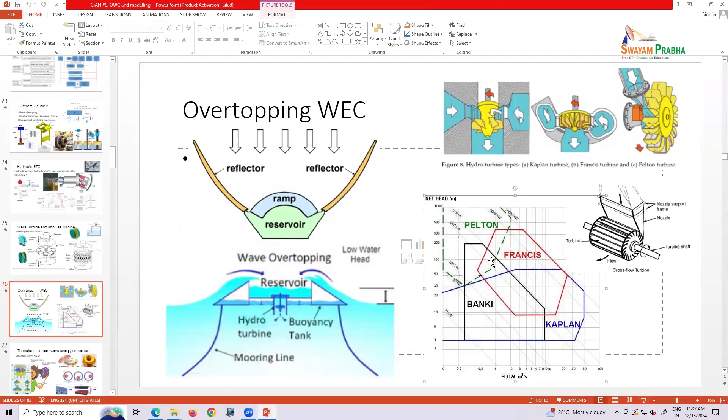And let's take a look again. Before that, I didn't put the figure of the Banki turbine. Okay, this is the Banki turbine, to give you a sense of what it looks like. Actually, it's just a cross flow turbine. So look at this figure again. I make it slightly larger. Okay, this direction is flow. This direction is head, right? How high the water drops.

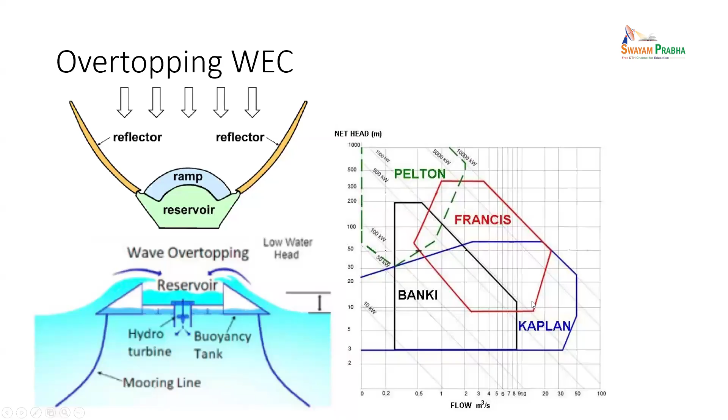Okay, and water head times flow is power. So this is why there's this line, 10 megawatts, right? This is 1 kilowatt, and that is 10 kilowatts, and this is the 1 megawatt line. Basically, the cross flow turbine and Banki turbine work for low head, 3 meters to 200 meters, at a flow rate of 0.2 cubic meters per second to about 8, right? So at a power rating less than 1 megawatt, it can be 100 kilowatts.

So for this suggested range, the energy and head relationship, in between there's a flow rate. Head times flow rate will be energy. This is why in this figure there's also energy here. Is this clear? So head times flow rate will be energy. Head and flow rate are the guide to help select the turbine. Water head is just potential energy.

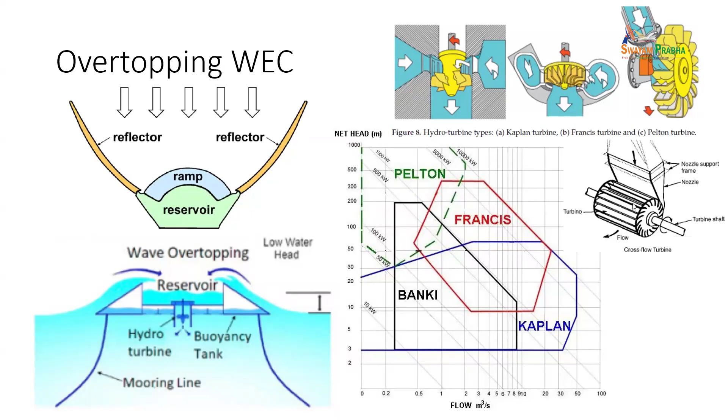This is overtopping. In overtopping, you accumulate water there, and the energy is just delta H times how much mass goes down at what kind of rate. Is this clear? Right. So anyway, this figure shows how to choose a turbine. And basically, this is very popular for traditional hydropower, for the very high mountain area where you go down, right? And this is mostly for overtopping. The head wouldn't be that high, right? Okay, so just cross flow and that type of turbine.

Okay, and self-rectifying turbine, self-rectifying generator, I think is very interesting, right? As you say, in your system you don't want the generator to change direction. There are many ways to achieve that. With a check valve, they use a piston with bidirectional motion and a check valve to convert bidirectional fluid motion into unidirectional, right? And the Wells turbine is self-rectifying. It's nice: air in and air out, the generator always rotates one direction. But there's still an intermediate medium; you use water to drive the air, then air drives this self-rectifying Wells turbine or impulse turbine.

Here, this fluid direct drive is more direct. You can do it at different stages, right? The best is the fluid side directly converting bidirectional motion into unidirectional. Another is the mechanical side, including check valve, one-way clutch, right? All this will be on the mechanical motion side. And sure, you can achieve something in the electric domain, right? The generator, if you go that way and you have voltage like this one, you convert AC to DC.

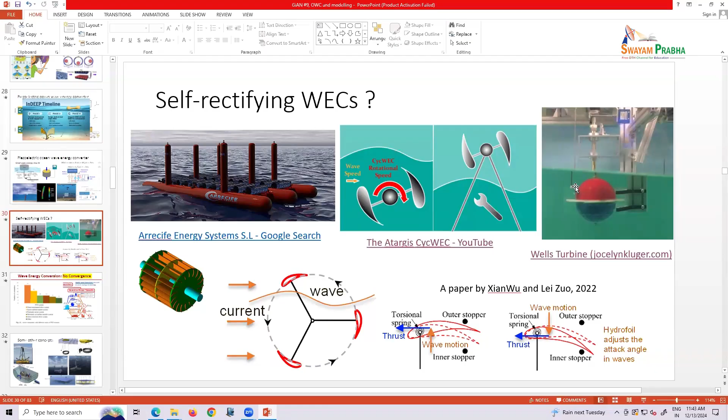So I have to say, a lot of figures I put here, I didn't get a chance to look into for education purpose. Previous 3 years when I taught that, I told students don't put it in public domain, this is for education purpose. But I didn't get a chance to put the reference and where I learned that, since this might be in public domain.

Okay, anyway, so there are many different types of design of PTO, and we talk about the mechanical system, electromagnetic system that can be scaled up, scaled down in a large range. In my view, such kind of system can work from 10 watts to 100, 500 kilowatts level. If you want to build a system like 1 watt or 0.1 watt, definitely the system wouldn't work that way because of the friction, right? That gives you some sense.

And such kind of system design is very tricky, and you need a lot of know-how. I give you one example. The ball screw has a lead angle, right? If the lead angle is large, the motion transmission would be small. Basically, you move up and down, the generator rotates at lower speed. However, if your lead is too small, the generator speed is high, but the ball screw's transmission efficiency is not good. Sometimes you may find out, wow, I need to use a larger lead ball screw, and put another gearbox, 1, 2, 3, whatever like that. Then efficiency will be better.

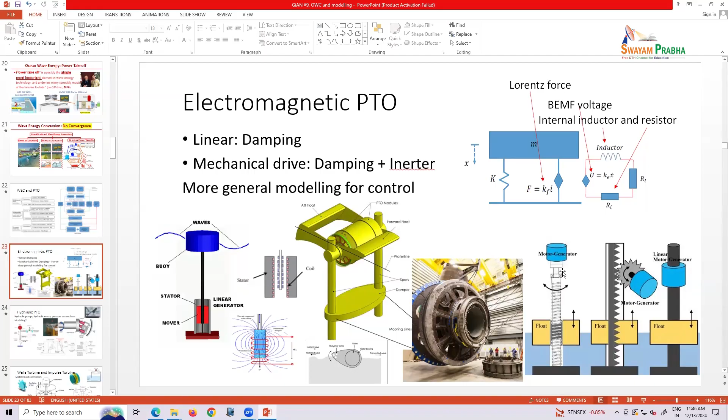When you design that, for example, the bearing looks like here, how to compensate the thermal expansion? For the support, you usually have bearings at two ends, right? If this shaft has thermal expansion and becomes longer, how to allow this bearing to move? Therefore, such kind of bearing usually has a fixed constraint here, and the other end is a slide, right?

For such kind of design idea, you can look into Professor Alex Slocum's open courseware at MIT, fundamental design. They teach you a lot of such kind of know-how. When I was a student, my advisor, a Slocum student, Samir Nayfeh, gave me Professor Alex Slocum's book to read. At that time, I didn't have experience in design. I read the book, wow, I fell asleep.

Okay, and after working years in a company, I looked into the book again. I feel, wow, Slocum really has a lot of good experience in design, right? It's different. So I always tell students design is not so easy. It's not like, okay, I get a technician and I can get the work done. No, it's not like that. It's a lot of know-how, a lot of knowledge.

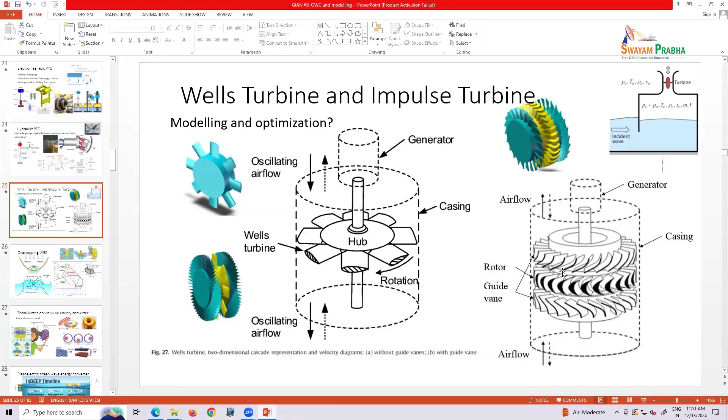There's some problem here you can imagine. The air is very dirty. When I visited a company in Spain, they built this turbine, and they had some sort of water spray on the turbine to clean the salt. In the ocean there's moisture carrying salt, and it accumulates, so they have to spray water to clean that.

So the overall wave-to-wire efficiency, considering the energy. Let me take you back to this figure, I'll give you some comments. So you go here, right? Some energy gets reflected back, and some energy goes to the air chamber. In the air chamber, the energy drives the turbine. I say the turbine efficiency can be 50, 40, or 70%, but there's certain energy loss here. Overall, the wave-to-wire efficiency is not that high. Some reports show 40%, but mostly it's much smaller than that.

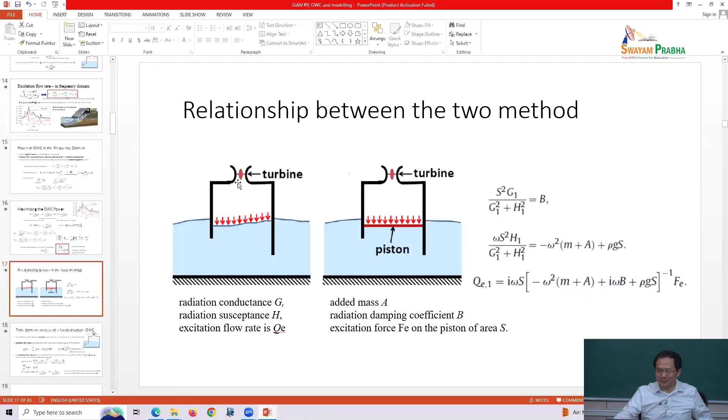By the way, does this turbine have a Betz limit or not? You know what the Betz limit is? The Betz limit is for wind turbines, and it's 59%. A wind turbine cannot exceed 59%. Who knows about the Betz limit? Raise your hand. Yes? Can you explain the Betz limit? "When the wind turbine converts wind power into electricity, the maximum amount of wind power that can be converted is determined by the Betz limit. For wind turbines it is 59%." Why is there such a limit? "Momentum theory. If we take the optimum value, d by dx, find the critical point."

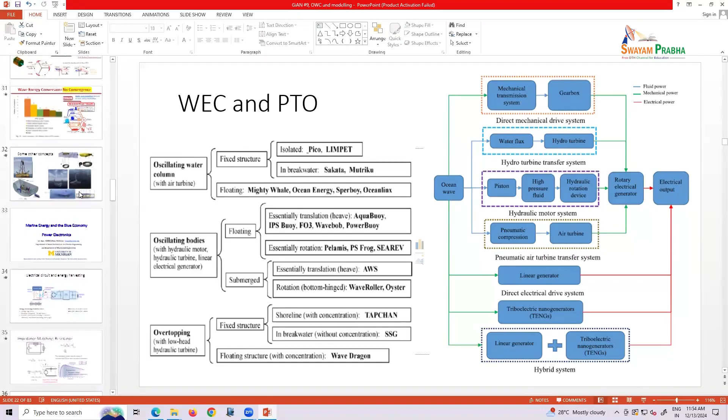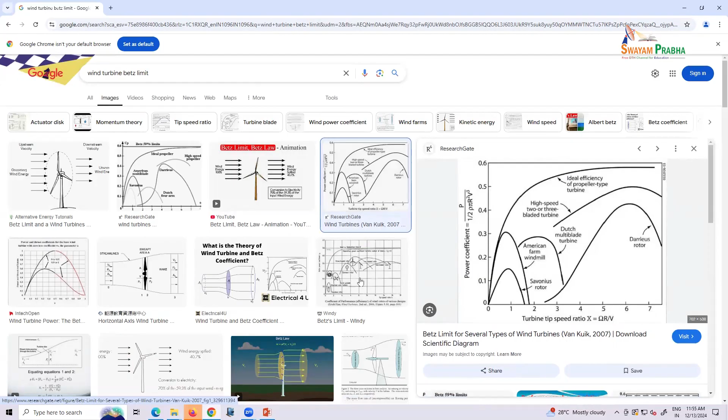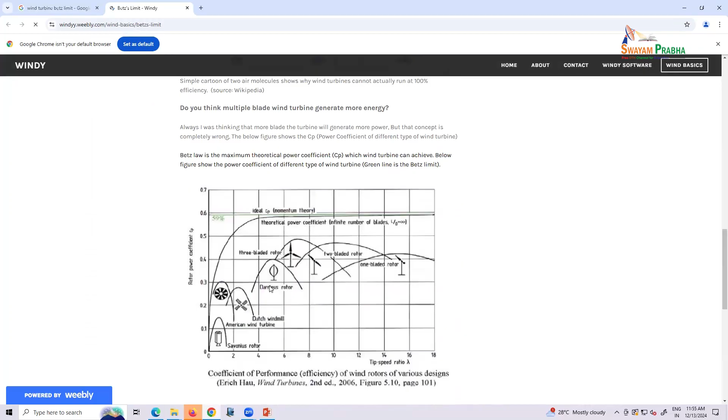Okay, so let me say it this way. I will chat with Professor Samet. If he doesn't cover that, I will cover some part in the next lecture. So this is a wind turbine, look at this figure. The ideal efficiency cannot exceed 59%, and it also depends on the turbine. I like this figure. Different turbines have different efficiency limits.

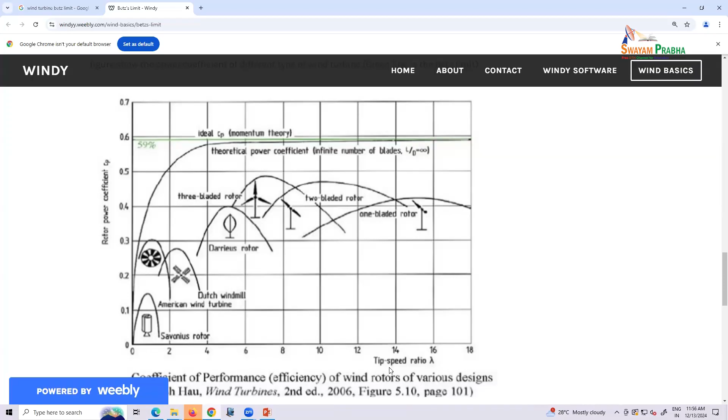So you have the popular 3-blade turbine, you can have 2 blades, a 1-blade turbine, an American turbine, a Dutch turbine, and these turbines have different efficiency lines. This is efficiency, this is tip speed ratio. Tip speed ratio is tip rotation speed divided by wind speed. So it can have a 59% efficiency limit. The reason is like this: when the wind blows on the turbine, and this nice figure.

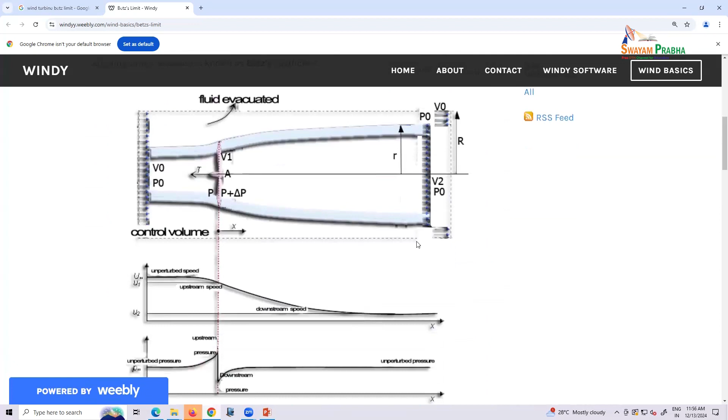Okay, and this is the streamline shape. Basically, when the flow comes here and hits the turbine, the streamlines go outside and become larger, wider, right? So then you have wind speed. Wind speed going through here decreases, right? It doesn't decrease to zero, but it decreases, right?

So in such a case, if you consider the wind speed decrease and flow rate, pressure, like that, you can find how the wind speed decrease is related to the power output, right? And if the wind speed decreases at this moment by 1/3, in such a case you maximize the power output. Okay, therefore, just imagine it that way.

If the wind here is totally blocked, the wind speed becomes 0, right? Then there's no energy getting out, right? If the wind speed doesn't decrease, then there's no efficiency either. So for this reason, the Betz limit is a scientific number you can get from the closed-form solution, right? And if you write the power as a function of the speed going through here, you'll find that when you reduce it by 1/3, you have the best efficiency.

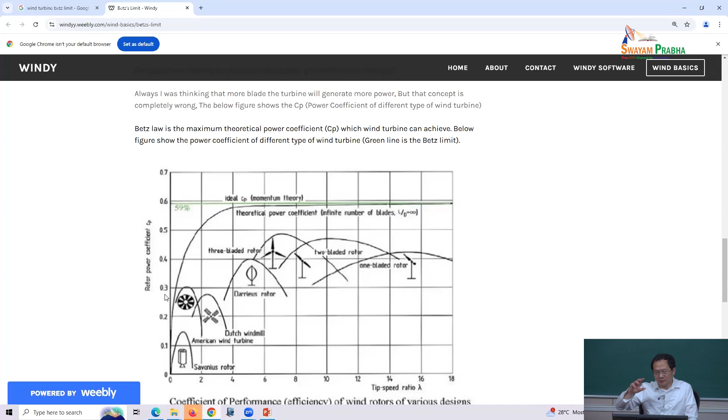So for example, this turbine, the American turbine, the efficiency is not high. However, for this turbine, the starting torque can be high. Starting torque, like if you work in a very slow speed situation, starting torque is important because of friction. Although during the rotation the efficiency is high, you have to overcome the friction, right? For this turbine, you get the sense. It makes sense to you.

You see, one blade, then another blade, then another blade. Almost every place is blocked, right? Then they generate more torque, right? Then the starting torque is high. Whereas this type of turbine, most of the area is not covered, the fluid goes through, right? Before it rotates, it looks like nothing blocks the water. Therefore, at the beginning, the starting torque will be low. Then you have high rotation speed, and you can generate high power.

Okay. So when you choose a turbine, a lot of people say, oh, efficiency is best, but if you find a very slow water speed, this one can be even better. Okay, because of starting torque. Okay, I just wanted to briefly mention that. I'll stop here and come back to the lecture.

Okay, so we talked about the advantages of different types of PTO: electromagnetic in a large power range, and hydraulic, where high power will be better. Pneumatic has an advantage; however, with this type of thing, if water gets into the system, it is also horrible, right? In storm conditions, you have multiple designs. For example, some people say, oh, I close the gate. After I close it, I have a side window to let the air get out, right? In that way, they prevent the water getting into the design.